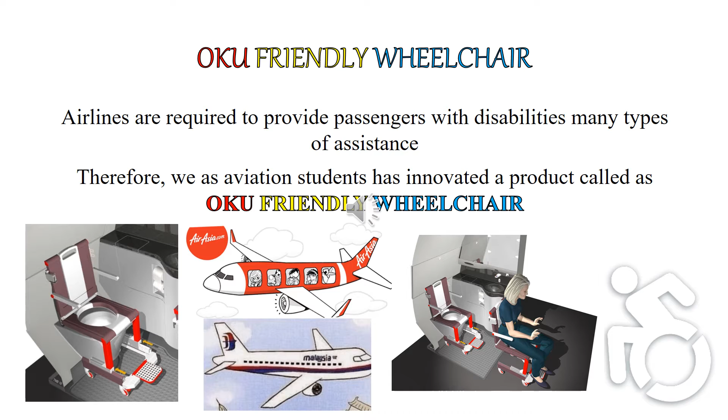Now, let's look into some of the disability passenger complaints that have been common among the airlines. First of all is the physical pain due to manual handling. Manual handling takes place from the door of the aircraft or the scissor lift to the seat, which has caused physical pain to some participants with disabilities, who felt that this is the worst experience of flying because of the physical pain it caused, or where physical damage could be unrecognized because of the person's disabilities.

And the second issue is turbulence and landing. This issue can be identified as a problem among the more disabled participants because of balance issues or because of sudden movements that can trigger muscle pain, resulting in awkward involuntary movements and embarrassment.

And the third issue is toilet issues. One of the biggest issues that wheelchair users often face while traveling by air is going to the toilet. Participants overwhelmingly stated that they had never even tried going to the toilet as they felt it was an impossible task due to the lack of accessible toilets on aircraft.

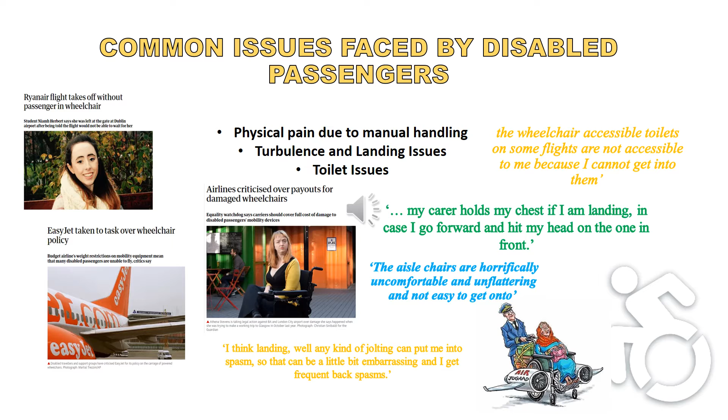Now, therefore, we have come up with this OKU friendly wheelchair, whose main purpose is to allow passengers to feel that they are equally treated as other passengers, and any person with loss of autonomy can rely on this wheelchair for better comfort and easy access in the aircraft. It also encourages disabled persons to frequently use air travel and experience it. Air travel could become smoother and less fraught for disabled passengers.

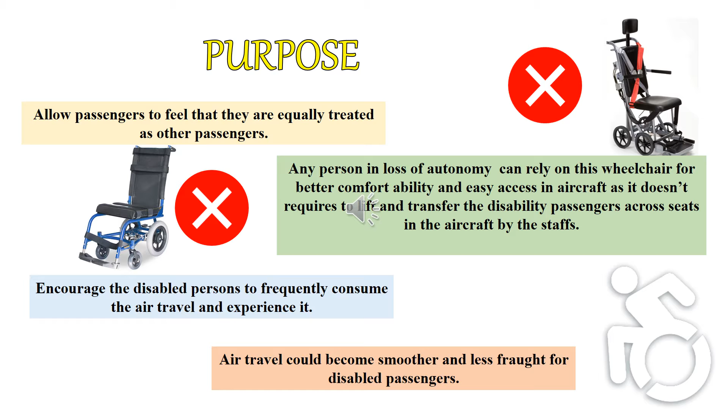Now, let's look into the design of this product. First of all, this product will be in-flight movable and it will be designed with an upper body restraint to support the upper body during turbulence. It also consists of a hydraulic reclining mechanism which will allow the wheelchair back to be adjusted up to 180 degrees, and it is also compatible with the maneuvering space, aisle width and seat height of the aircraft.

For the battery management, an electronic device incorporated in the battery circuit will be fitted to protect the battery, and the adjustable height chair installs directly over the toilet. There will also be features such as the hydraulic reclining mechanism and removable or adjustable parts such as the seat cushion and headrest as well.

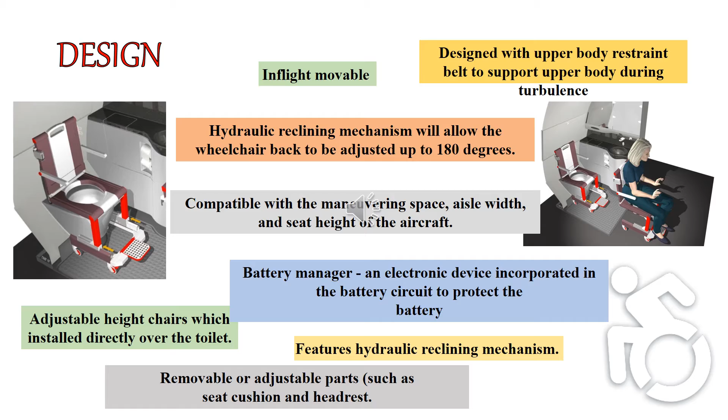The wheelchair will be powered by lithium-ion batteries, and there's no limit to the watt-hour rating for the installed batteries as the battery will be fixed and non-removable. The wheelchair may carry a maximum of one spare battery not exceeding 300 Wh, or two spares each not exceeding 160 Wh. It will also be water resistant, designed in such a way that it does not absorb water and can be cleaned easily.

And there are also other features such as footrest and armrest, which are movable or removable, an adequate occupant restraint system, a backrest height that permits assistance to the passengers, and the wheel locks as well.

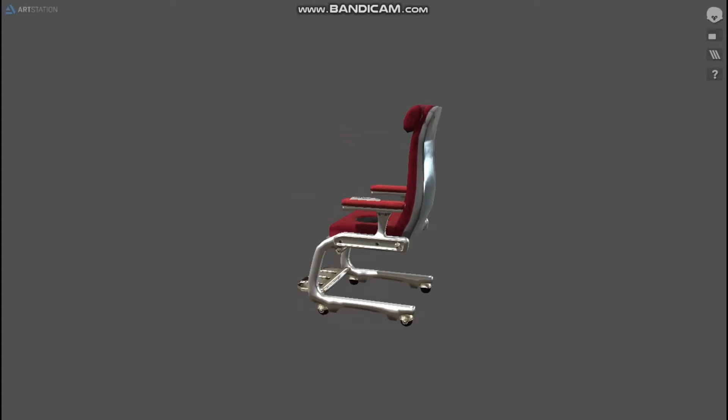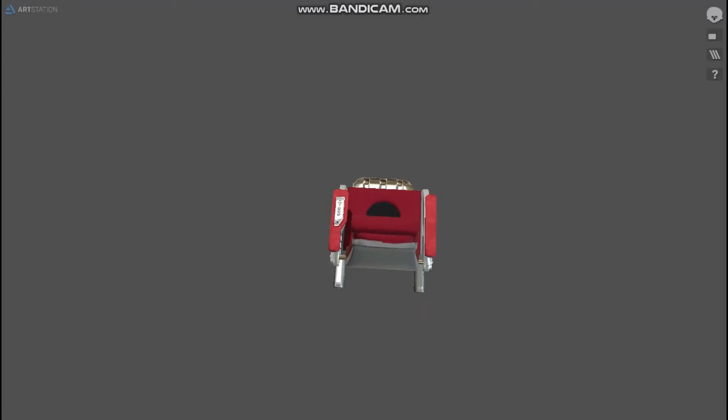We present you the 3D model of our OKU friendly wheelchair. This is how our 3D model looks, however, it's just the basics. The first thing is the reclining mechanism, which, as I told you earlier, can be reclined up to 180 degrees. The opening and closing area is for the toilet facilities, which disabled passengers can open and close when they attach this wheelchair to the aircraft's toilets.

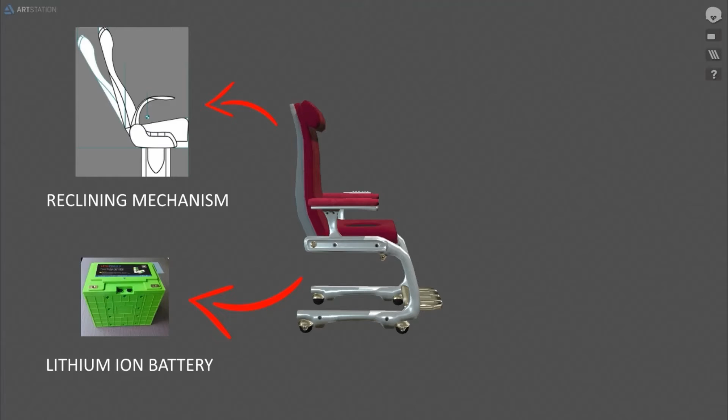A lithium-ion battery will be fixed underneath this OKU-friendly wheelchair. This wheelchair's height is adjustable, as it needs to adjust its height when attached to the toilets. There is also a leg rest belt to support the user's leg. It is detachable and easy to clean or take away.

The chair fits through narrow passageways to wheel over the aircraft toilet. It can carry a weight of more than 50 kg. This wheelchair features exactly the same as normal cabin seats, but with the advantage of a movable toilet and hydraulic reclining mechanism, and other beneficial features.

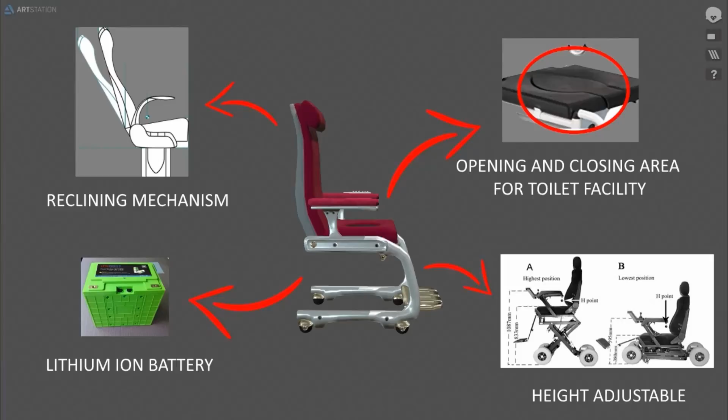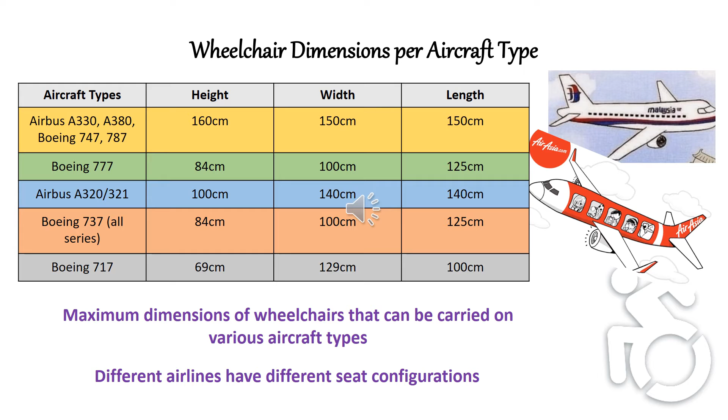Wheelchair accessible compartments must be at least 60 inches wide and 56 inches deep, and there are also regulations for the side wall grab bar, which must be at least 42 inches long and located 12 inches from the rear wall. The constructed environment must follow clearly defined specifications and standards to ensure that the constructed facility meets the needs of persons with disabilities.

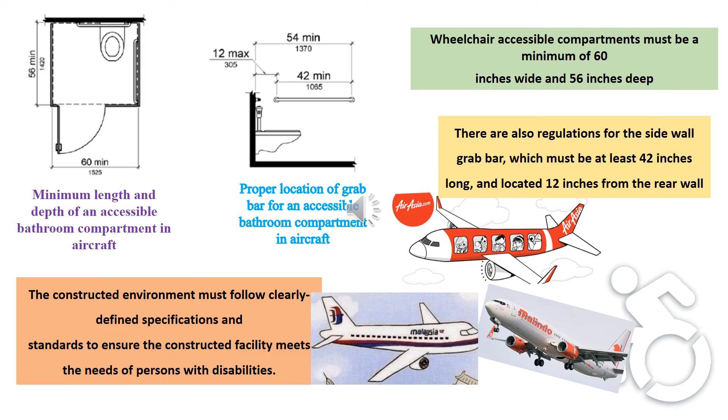Now, when we look into the design of the product development, first it will start from the sketches, then move on to the working prototype, then manufacturing instructions, and then to full-scale production. It will cost from RM 10,000 to RM 30,000 per chair for a basic economy seat of OKU-friendly wheelchair, and the lithium-ion powered battery will cost 3,600,

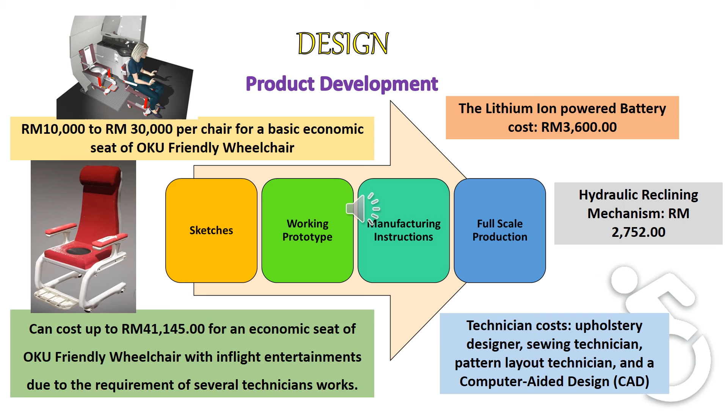and the hydraulic reclining mechanism will cost at least 2,752 ringgit, and this cost can go up to 41,145 ringgit for an economy seat of OKU-friendly wheelchair with in-flight entertainment such as Wi-Fi, video screens, and other facilities, due to the requirement of several technician works. The technicians can be the upholstery designer, sewing technician, pattern layout technician, and computer aided design as well.

This market study was released by the Open Doors Organization. It shows that at least 27 million United States travelers with disabilities took a total of 81 million trips and spent at least 58.7 billion on travel in 2018 to 2019, up from 34.6 billion in the prior 2015 study. As a conclusion, our product has a high possibility to be commercialized in a good way via advertisement and so on.

However, currently as we are going through this pandemic, we are very sure that this pandemic situation can make air travel more difficult due to movement restrictions. However, in future, we highly hope that one day air travel, cruise travel, and tourism will gain back their strength and be back to normal. So therefore we can give chances and opportunities for disabled people to travel as they wish and in their comfortable way.